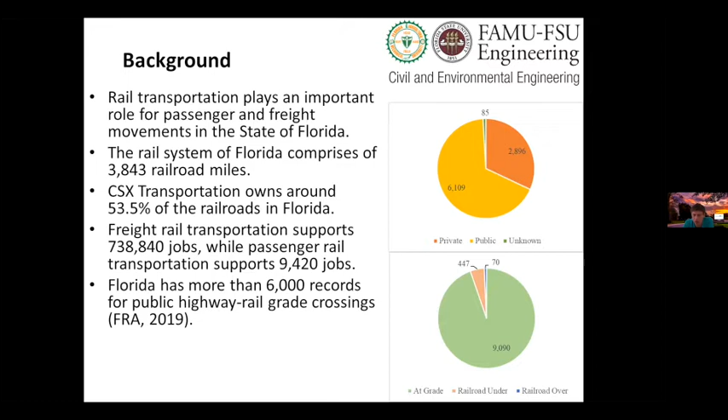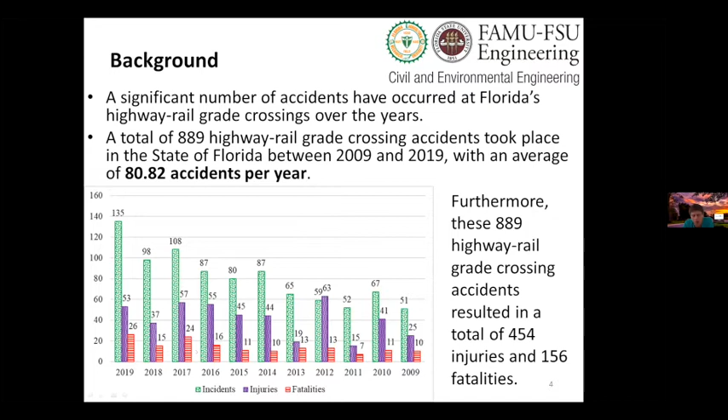One critical concern here is that we consistently see fatalities, anywhere between 10 and 15 fatalities, pretty much every year.

So, more background information: how can we improve safety at rail crossings? The state of Florida, in particular the Florida Department of Transportation, is responsible for implementing safety improvement projects. They're trying to bring some difference to these statistics and tendencies, and improve safety and reduce the associated number of accidents. How can this be done? Well, they generally implement different types of countermeasures, such as flashing lights, wigwags, and cameras.

In some cases, countermeasures do not help. After installing, let's say, a passive crossing that only has a stop sign, if they install flashing lights and gates but the crossing is still vulnerable, all these countermeasures do not help. In this case, they implement a radical countermeasure called grade separation, meaning that instead of a grade crossing, they build either an underpass or an overpass, eliminating the point of conflict between railroad and highway.

In some cases, grade separation is actually a very expensive countermeasure—it can go up all the way to $1.5 to 2 million per crossing. In other cases, they do something different: they abandon the crossing, essentially stopping either highway or railway movements. This is another way to deal with accidents and improve safety.

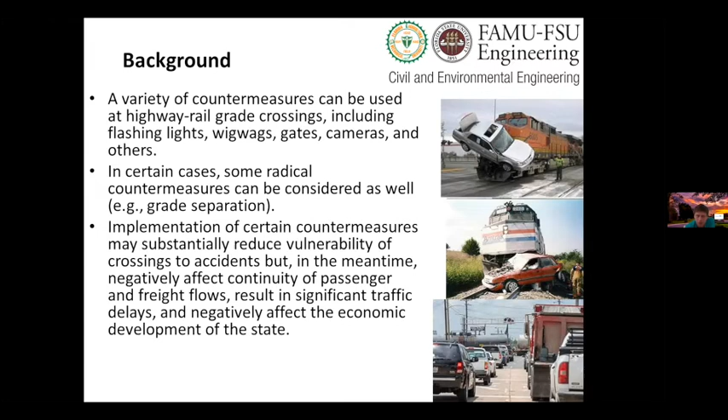We also have to keep in mind that these countermeasures may cause delays. Another critical challenge that the Florida Department of Transportation has to consider when implementing safety improvement projects is the limitation in terms of budget.

There is a federal program called Section 130. As part of this program, the Florida Department of Transportation receives a certain amount of money every year from the U.S. Department of Transportation, typically anywhere between $7 and $8 million. This funding is specifically dedicated—the name of the Section 130 program is Railway-Highway Crossings. They receive this funding to figure out what crossings have to be upgraded and what type of countermeasures should be used.

We saw in the previous slide there are over 6,000 public crossings, so $7.5 million is definitely not enough. It becomes challenging to figure out what crossings have to be upgraded and what type of countermeasures should be implemented, because the cost of countermeasures varies. Installing a gate at a passive crossing can cost up to $200,000, and each gate structure will also have yearly operational and maintenance costs. All these things have to be considered when trying to improve safety at highway rail grade crossings in Florida.

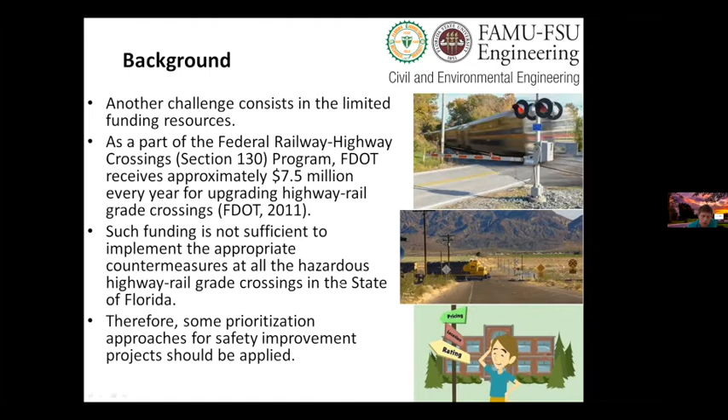Now we're going to discuss a bit more about the causes of accidents. What are the primary reasons for accidents at highway rail grade crossings, and why do we consistently see fatalities—every year more than 10 fatalities in the state of Florida?

There's a first group of factors called the physical characteristics of crossings, which include the total number of tracks and the highway pavement type. Some highways are paved, and some crossing highways are actually not paved—either gravel or dirt road. There's also illumination type; some crossings are illuminated, but many are not, which can be another reason for accidents. And surface type—there are different types of surface materials at rail crossings.

Number of traffic lanes crossing the railroad also matters. Some crossings, especially in busy metropolitan areas, have up to 9 traffic lanes crossing the railroad in Florida. The more lanes we have, the higher potential vulnerability of drivers we may observe. There's also functional classification—what type of highway is crossing the railroad—and of course, warning device type.

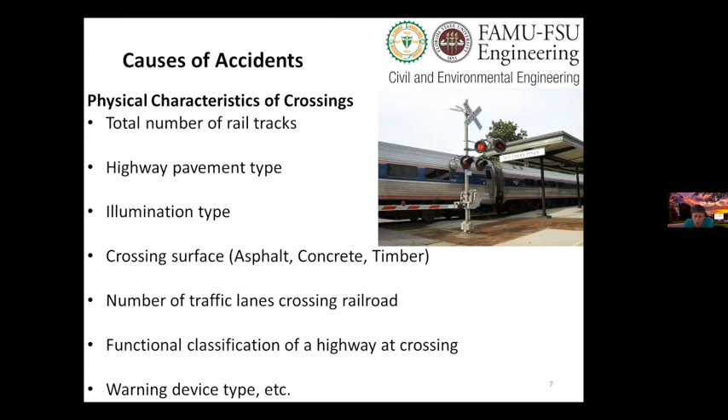Some of the common active types of warning devices are flashing lights and gates. These are the most typical ones. So let me give you a bit more statistics so you may have a better understanding of how accidents happen in the state of Florida and how existing warning devices are actually associated with these accidents.

Some of you may think that installing active types of protection is going to help, since we're going to have a gate arm blocking traffic, right? The vehicles are having some resistance, they cannot enter the crossing right away.

But when we look at the statistics, showing numbers of accidents between 2015 to 2019, number of crossings that experienced accidents, we see that most of these crossings were active. The gated crossings actually experience more accidents compared to ones that have just stop signs or crossbucks. It's contradicting, right? Typically we'd expect more advanced protection to help prevent accidents, but this is actually the opposite.

Why does this happen? The first reason: active warning devices are installed at crossings with high exposure. These crossings most likely have more traffic, unlike ones that have just a stop sign or crossbuck, which don't have much exposure, traffic volume, or train volume.

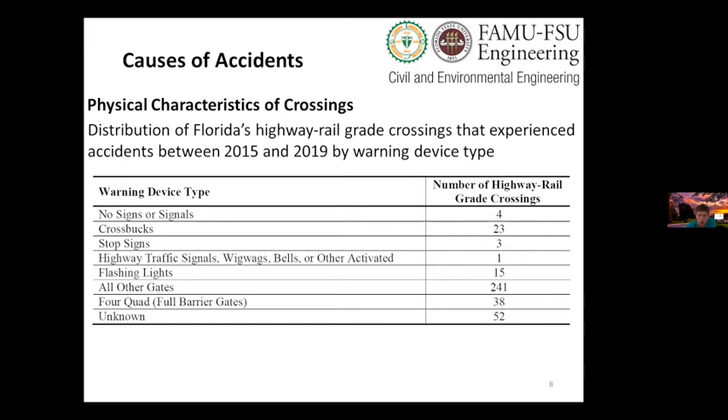Coming back to the previous discussion, illumination plays an important role in rail crossing safety. Looking at statistics again, 151 crossings were unilluminated and experienced accidents. What state departments of transportation generally do is look at illumination statistics and see if a crossing is unilluminated and if it experienced accidents during nighttime.

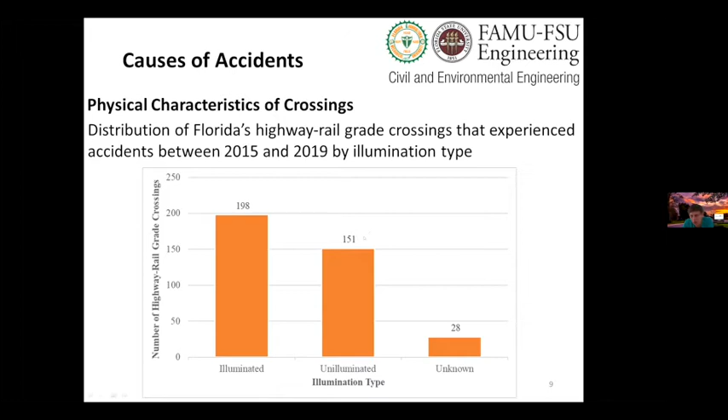The easiest way to upgrade this crossing is to just install illumination. It does not require a lot of funding or purchasing advanced types of warning devices. Just install illumination, and it can be considered a low-cost countermeasure to improve safety.

Another group of factors is called operational characteristics of crossings. So far we've been talking mostly about physical characteristics of crossings. Operational characteristics may also be one of the reasons that create potential conflicts and accidents at rail crossings. The very first factor, which I already partially mentioned, is exposure.

If we have a higher number of trains and vehicles going through the crossing, it creates higher vulnerability. Then, maximum timetable speed: many drivers have difficulty perceiving the actual speed of the train. Some studies show drivers think the train is going slower than its actual speed, so crossings with higher train speed have a higher probability of accidents.

Along with train speed, the posted speed limit of the highway also plays an important role. And of course, type of train matters—we check whether the crossing has more passenger trains or freight trains. Passenger trains are not very long but may go at much higher speeds compared to freight trains, which generally go about 30-40 miles an hour but can be very long.

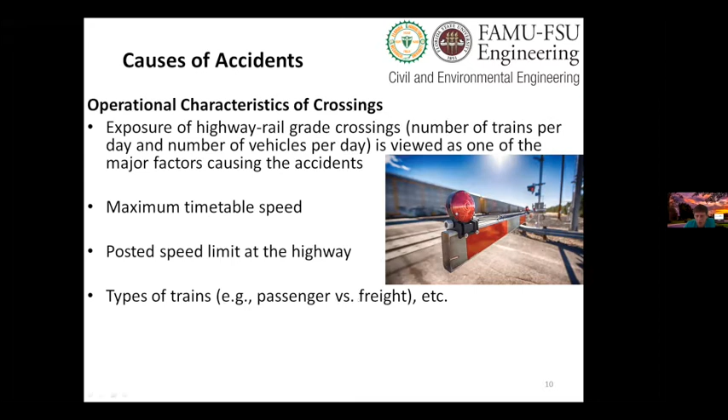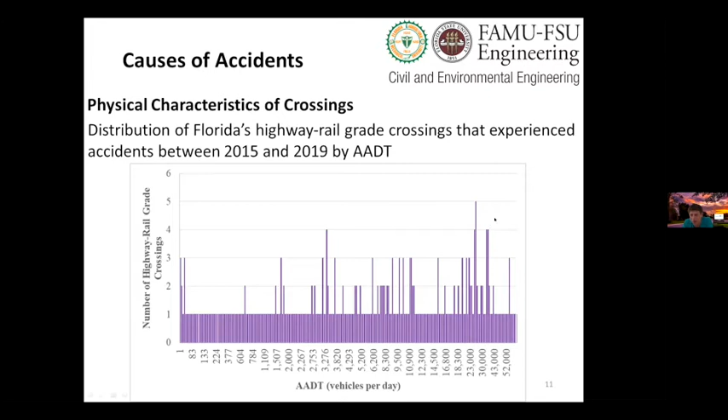These trains can create a very long blockage event, supporting my previous discussion with statistics. If we look at AADT at crossings that experienced accidents between 2015 and 2019, we see a growing trend. Some crossings in Florida have more than 50,000 vehicles per day, mostly urban crossings, and we see the number of accidents in these crossings is higher compared to crossings that don't have much traffic.

Also, talking about train speed, we see that most of the crossings that experience accidents have very high train speed, up to 80 miles per hour. Most of these crossings, when you see numbers greater than 50, have a lot of passenger trains. Freight trains generally don't move faster than 35 to 40 miles an hour.

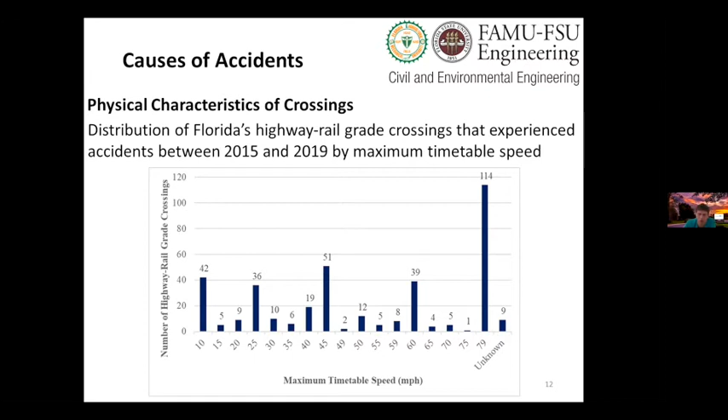Now we are slowly approaching a very important discussion about human factors and aging adults at rail crossings. Some studies show human factors are an important contributor to accidents, and in particular, gender can play an important role. A lot of male drivers are willing to take risky actions at rail crossings, like the zigzag violations we discussed, when gates are in horizontal position and some drivers are still willing to drive around the gate. Female drivers are generally more conservative, so gender plays an important role.

Speaking specifically about aging adults, a couple of studies show that aging adults suffer more severe injuries as a result of accidents, especially during inclement weather conditions. This particular study by Hao et al. 2017 studied foggy conditions and noticed that aging adults have higher severity in this type of accident.

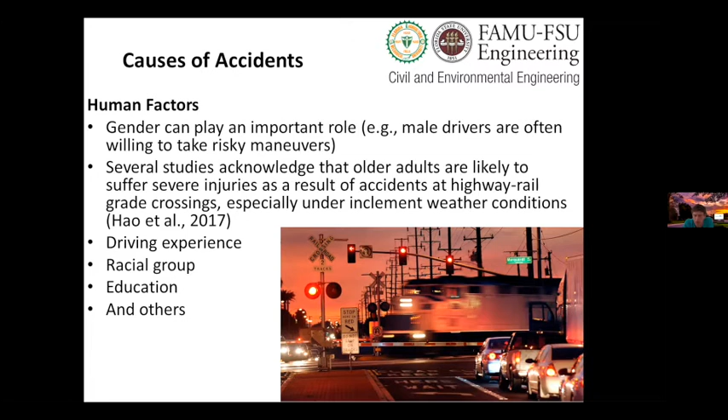Another important component is education. Individuals with advanced degrees who know more about safety issues, especially at rail crossings, are going to be more careful compared to individuals who are not aware of potential safety hazards at rail crossings. So far we've talked about different factors, including physical, operational characteristics, and human factors. Are there any questions at this point?

Can I ask a brief question? Yes, please go ahead. How much does alcohol play a role in these types of crashes? This reminds me very much of wrong-way crashes in terms of the factors involved. How overrepresented are alcohol or drunk drivers in this?

This is actually a very good question. I have not seen any study which evaluated the effect of drunk driving on crashes, and the reason is that they do not report this data. There are two main databases where you can get crash data. The first is the FRA Federal Railroad Administration Inventory Database, which contains basic characteristics of crossings: number of traffic lanes, number of tracks, number of trains, and stuff like that. The second is called the FRA Accident Database. It does not report any alcohol data there, they do report age and gender, but nothing else, so none of the existing studies actually evaluated the effect of alcohol on potential accident occurrence.

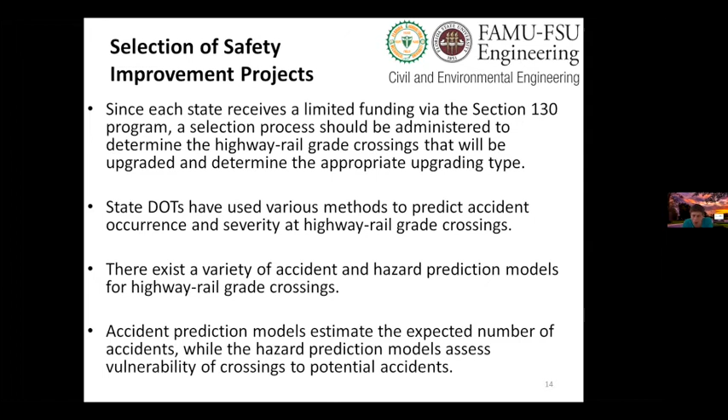One common method used to prioritize crossings and identify the most hazardous ones involves models called accident prediction models and hazard prediction models. Accident prediction models help estimate the predicted number of accidents—they can tell how many accidents a crossing is likely to have in the following year or multiple years. Hazard prediction models, on the other hand, don't give an exact number of accidents; they define vulnerability through a hazard index, which determines a crossing's vulnerability to potential accidents. In the next couple of slides, I'll show you some common accident prediction and hazard prediction models so you have a better understanding of what they do.

I'm not going to present all of them—there are more than 20 in the US. The first one, a nationally recognized model, is called the Coleman-Stewart model. Essentially, it estimates the log of the number of accidents based on physical and operational characteristics of the crossing.

We see here some factors called B and C factors. These are coefficients which come from existing protection, the type of warning device used at the crossing, based on urban-rural designation of where a given crossing is located, and the number of tracks, whether it's one main track or multiple tracks.

There are also some basic operational characteristics, like we discussed: exposure, average daily vehicle movements, and average daily train movements. All these factors define the expected number of accidents. This is the Coleman-Stewart model.

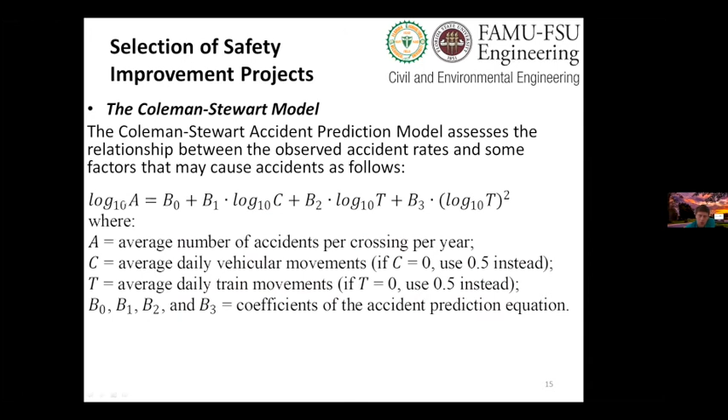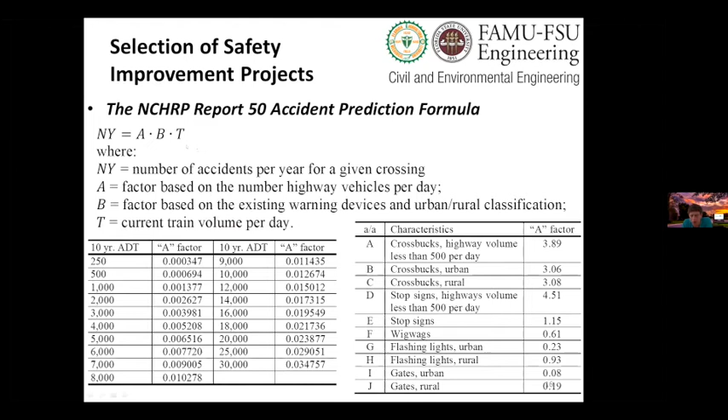Another nationally recognized model, an accident prediction formula developed by the National Cooperative Highway Research Program in NCHRP Report 50. This is a simple formula. It estimates the expected number of accidents based on A factor, B factor, and T, which is the current train volume per day. The A factor is based on ADT, the average number of daily vehicles. The B factor has to do with the crossing's physical characteristics, determined based on number of stop signs, type of protection, and urban-rural designation.

The A factor comes from exposure. We look into the number of trains and the number of vehicles, considering exposure in a more comprehensive way because it distinguishes trains by type, speed, and other important factors, unlike the previous formulas.

Along with the exposure factor A, there is a hazard rating factor B, which depends on number of blind quadrants, number of tracks, number of lanes, and other geometric features of the crossing. The last one, the C factor, depends on the type of area where the crossing is located, urban or rural, and based on the existing protection.

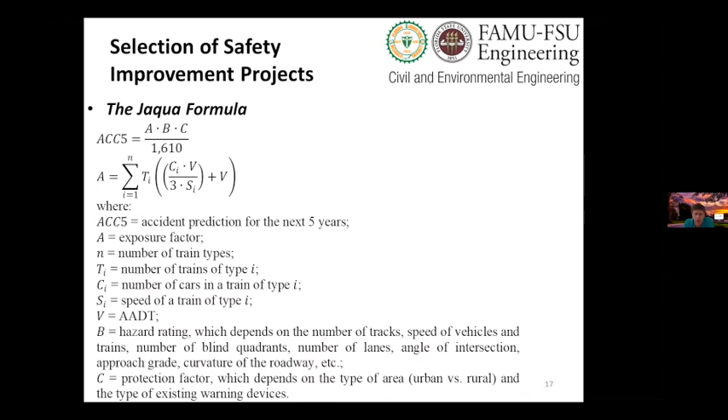So far I've presented some accident prediction models. What is the main drawback of these models? Well, accident prediction models give us the exact number of accidents, which in reality is very hard to obtain, because there are so many factors that cause accidents. It's hard to get a very accurate number of accidents.

That's why many states do not use the actual number of accidents. They use approximate methods called hazard index methods. Instead of stating the exact number of accidents, hazard index models give us vulnerability — some sort of index to determine how dangerous a given crossing is.

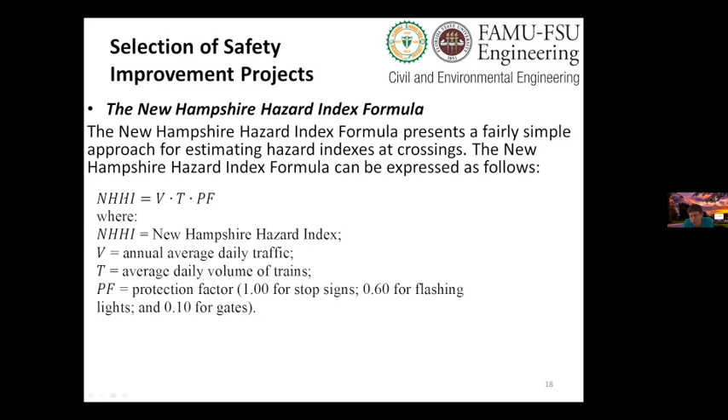Just to give you a general understanding, a very well-known formula is called the New Hampshire Hazard Index. It estimates crossing hazards based on average daily traffic volume, average number of trains per day, and a protection factor, which is a number depending on the type of warning device you have. Again, we're not getting the number of accidents, just an estimation of the potential hazard of the crossing.

Then another formula, the California Hazard Rating Formula, has some similarities with the New Hampshire Index. It takes into consideration exposure and protection factor, but unlike the New Hampshire Hazard Index, it also considers accident history — the number of accidents that occurred in the past 10 years. This is a good thing, but the main drawback of the formula is that it over-relies on accident data.

10 years is too much time, because a lot can happen with a crossing in that period. The state DOT can come and install a countermeasure, after which the crossing becomes completely different. So we cannot count accident history the same way throughout; we have to consider periodical upgrades. This is the main drawback of the California Hazard Index formula.

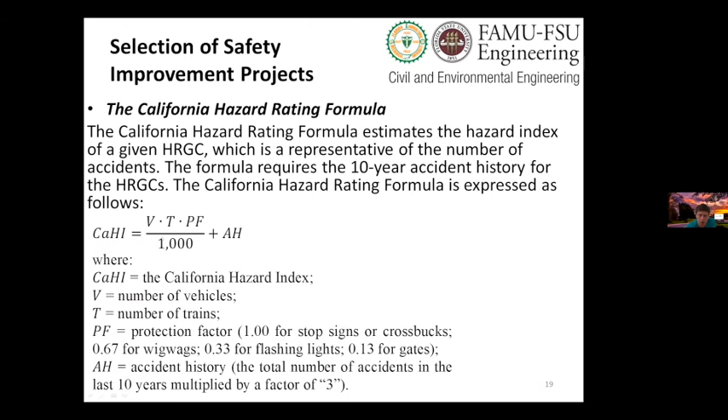And what do we use in Florida? This is something we developed the previous year. We had a project with the Florida Department of Transportation, and we developed a formula which can be used to prioritize crossings in the state of Florida for safety improvement projects. We call it the Florida Priority Index.

This is a measure used for prioritization, and the way it is estimated, we consider the number of vehicles per day, the number of trains per day, speed of trains, protection factor, what type of existing warning devices are used, and accident prediction.

For accident prediction, unlike many other formulas, we consider upgrades. So A is the total number of accidents in the last 5 years since the last improvement. We compared this formula against well-known formulas, including New Hampshire Index, California Hazard Index, Michigan Hazard Index, NCHRP formula, and many others, and this gave the most accurate ranking.

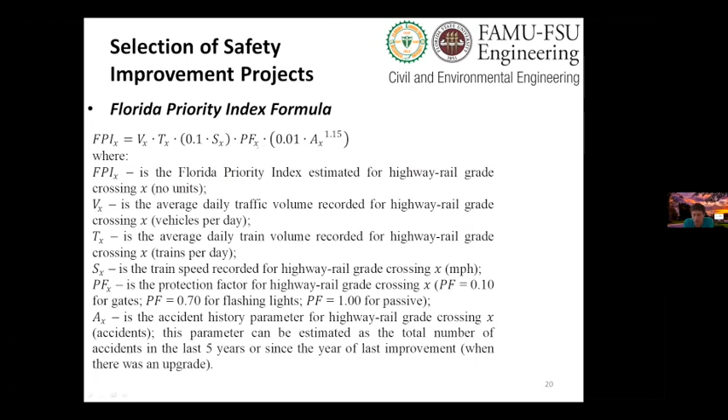We were able to capture crossings that experience most of the accidents. This is very helpful to Florida Department of Transportation, because so far they've been using an accident prediction model that required a lot of calibration. It was a huge regression-based model, and they had to spend a lot of time calibrating coefficients every year. This one doesn't have many coefficients. It's very easy to work with, and it should last for many years before they need to test it again.

So far I've discussed the main approaches for prioritizing crossings in different states. What we've seen is that many of these models mostly consider physical and operational characteristics. Each model has exposure—every model considers number of trains per day and number of vehicles per day.

Some formulas do account for additional physical characteristics, like warning device type, what they call the protection factor—what type of protection a given crossing has. Some formulas consider accident history, which gives us an understanding of what's happening with the crossing every year, whether it's experiencing accidents or not.

The main challenge is that none of these formulas—and I'm saying not just the ones I discussed, but in general all the formulas, a total of 21 formulas in the US—none of them considers human factors. You will never see age, gender, driving experience, like Dr. Wood was mentioning, additional factors like alcohol, whether the driver is using medicine or other drugs. None of these formulas account for these factors.

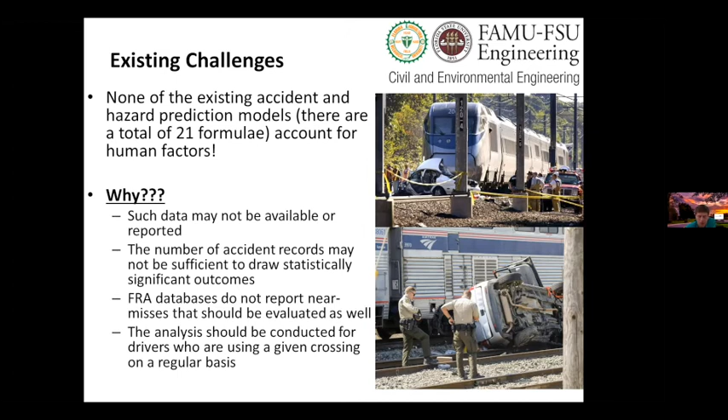But again, this is critical. Future models should definitely consider that, because it's common knowledge that social demographic characteristics of individuals, including age, gender, education, health conditions, definitely affect their driving performance. Age-related changes definitely impact driving abilities, including changes in hearing, vision, cognition, perception, and so on.

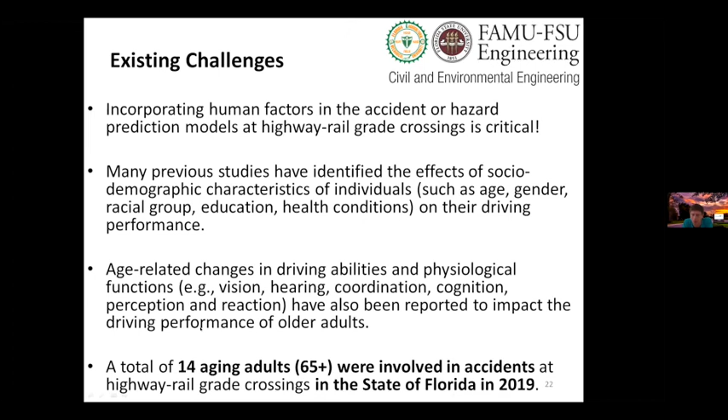Like I mentioned earlier, there is some portion of aging adults, 65 plus, involved in accidents in the state of Florida in 2019. Maybe it's not as significant compared to the total number of accidents, but still we have to design crossings and make them friendly for aging adults, making sure they feel comfortable when they approach crossings.

And how can this be done? How can we come up with models that account for social demographic characteristics of drivers? Well, of course, we have to conduct some surveys of the population inhabiting areas that have a lot of highway-rail grade crossings, because we essentially have to study the roadway users. So we have to know what kind of education they have.

We have to know their driving experience, how often they drive, how far they drive. This will give us better understanding of whether they're experienced users or not. Then, once we have all this data, we'll have to administer some driving simulator studies.

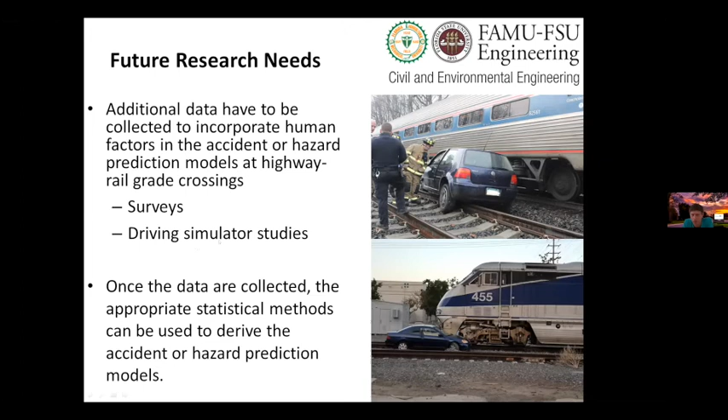And what we can do is actually design some driving simulation scenarios where a vehicle is approaching a crossing. Here, though, one challenge will be that we'll have to consider a lot of scenarios, because we'll need to determine the effects of a warning device - what type of warning device we're going to have. We will have to change the speed of the train.

We'll have to change the number of tracks. Definitely we'll have to consider different types of settings, whether it's an urban crossing that has a lot of buildings surrounding the crossing, or whether it's going to be a rural crossing that doesn't really have much additional obstruction, and so on.

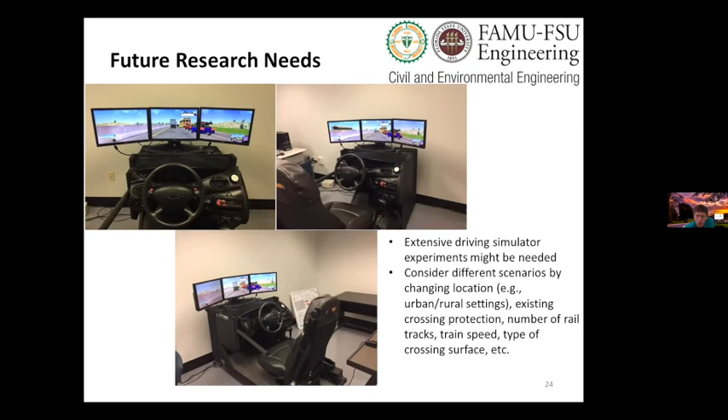So, some concluding remarks. I want to leave a few minutes, about 10 minutes, for Q&A. So let me conclude this presentation.

The purpose of this presentation was to discuss the importance of rail transportation in the state of Florida, some safety issues associated with crossings, and highlight some of the main reasons behind accidents at rail crossings. We identified three major causes of accidents, including physical characteristics of crossings, operational characteristics of crossings, and human factors. As part of Section 130, each State Department of Transportation receives funding for safety improvement projects to figure out which crossings have to be upgraded, as well as the appropriate upgrading type.

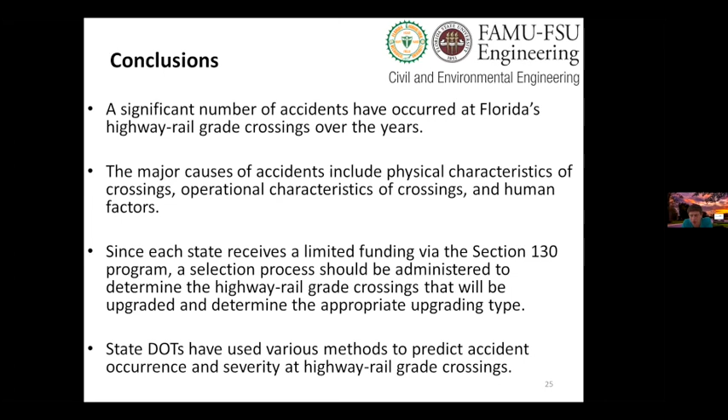And DOTs use particular prioritization methods, which are based on accident prediction or hazard prediction. This method helps them figure out the top crossings, the most dangerous crossings, and then they can use different countermeasures to upgrade them. The problem with these methods, with the existing accident and hazard prediction models, is that none of them accounts for human factors. We do not see very important social demographic factors that can definitely be contributors to accident occurrence.

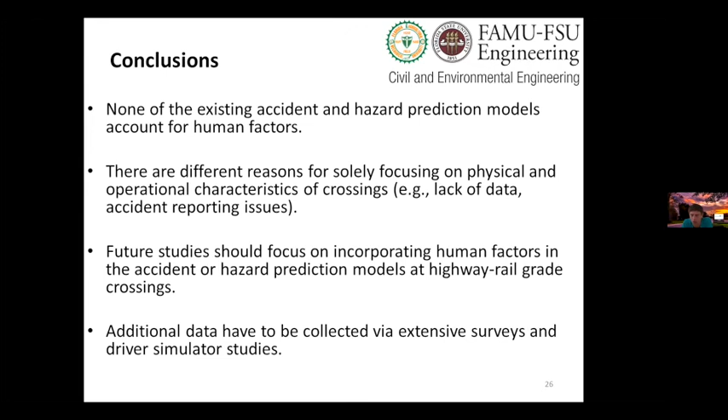As I mentioned earlier, the state of Florida, in particular the Florida Department of Transportation, is very interested in highway rail grade crossing safety. A lot of our research has been supported by them, and we see their interest in improving existing accident and hazard prediction methods. With this type of work, we can also approach other agencies like FRA, the Federal Railroad Administration, NSF, the National Science Foundation, USDOT, and so on.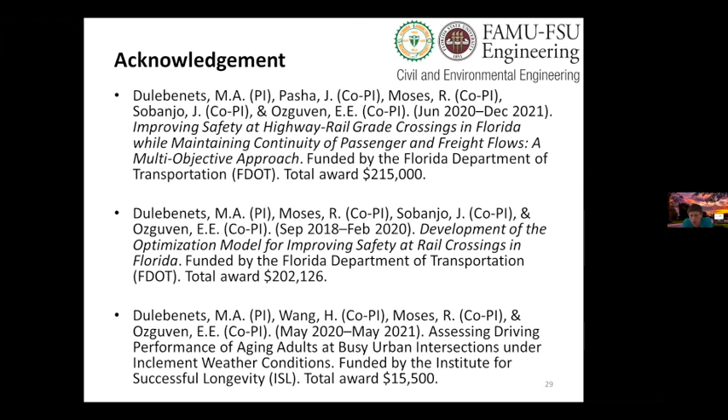So that's all I have now. I'd be glad to share the PowerPoint with any interested individuals. If you have questions, you can email me, or since we still have several minutes left, we'd be glad to address them right now.